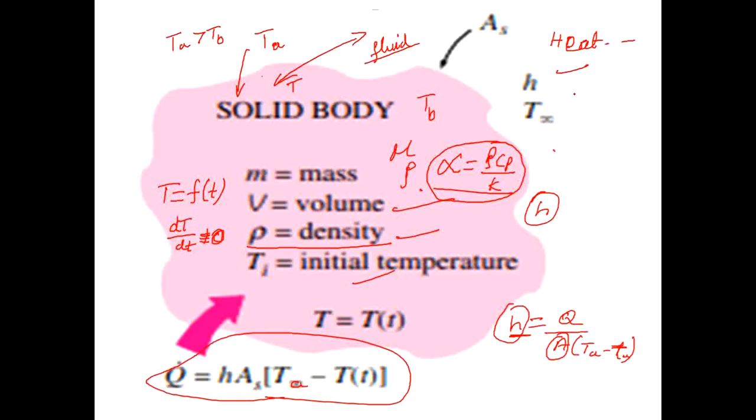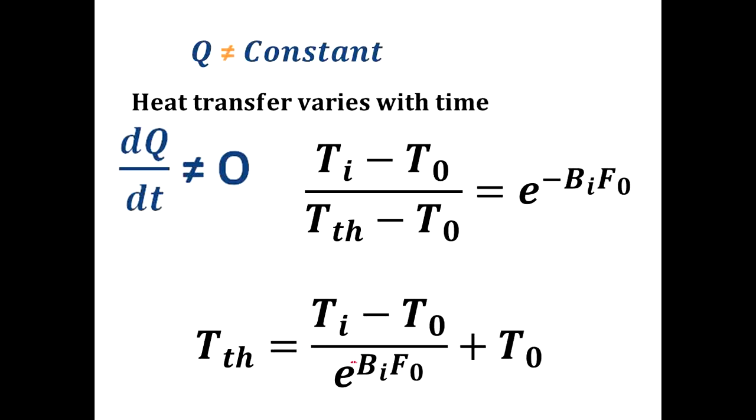An example or application of transient conduction is the heat treatment process. A very good example is the heat treatment process. Another example of transient conduction: sometimes you can consider refrigeration also as transient conduction. Therefore, this is the equation. You have already derived this equation. This is supposed to be minus Bi F naught. What are these things? Let me explain.

From the hot body to outside, the heat is transferring. Fluid, LC, volume by area. What is LC? Characteristic length you want to take: volume divided by area. This is the fluid. The fluid will have the properties mu, rho, K; all these are very important properties. Specific heat is also very important. And also the hot body, the solid body. This is supposed to be the solid body.

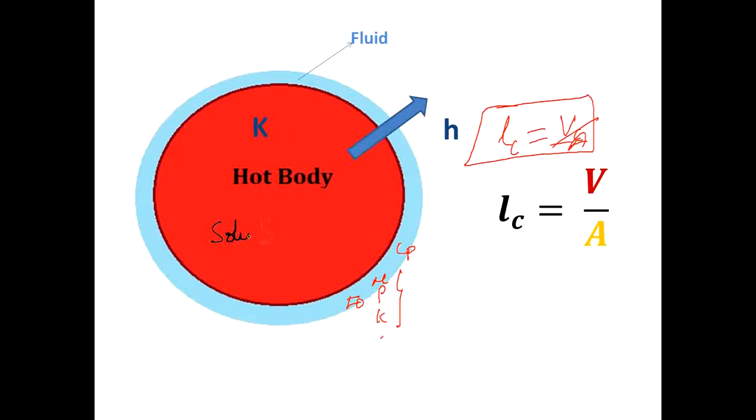This is the experimental setup in our college. How does it work? Let me tell you. We will heat the oil bath. After heating, the oil bath reaches a certain temperature, let me say 110 degrees Celsius. After that, I will keep the specimen. When I keep the specimen here, heat is transferred directly from the oil to the specimen. That is the heating process. I will write a tabular column like this.

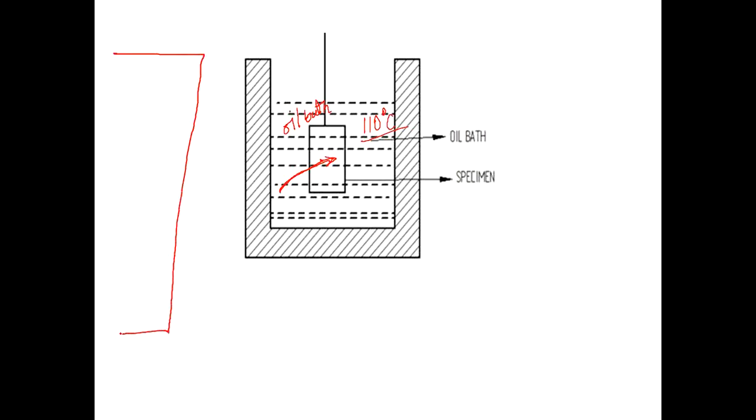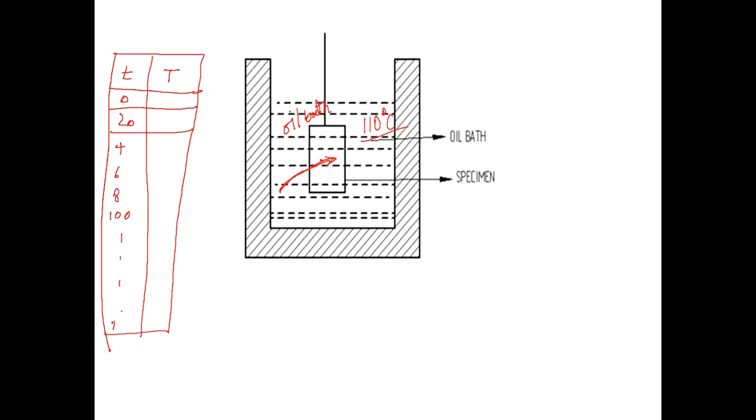Here I will put the time, because temperature will vary with respect to time. At intervals of 0, 20, 40, 60, 80, 100, like this I will go on noting the time up to 400 seconds. At that particular point, whatever the temperature is, from the connected thermocouple, I note the temperature. It will go on like this. Now what will happen? Let me explain this one.

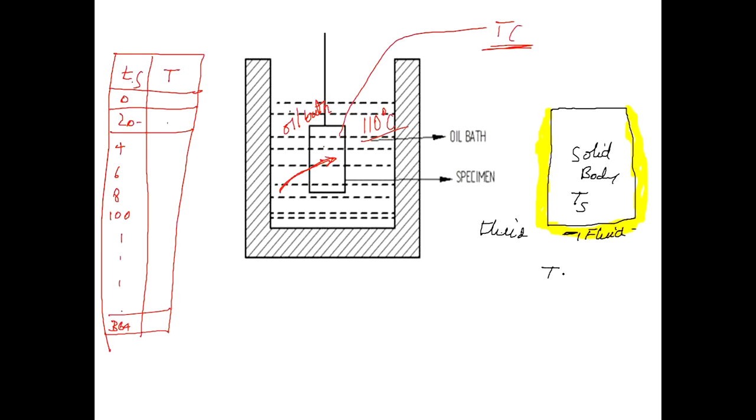This is the solid body, and the fluid. This portion is the fluid film. The fluid film is in between the solid body and the fluid. The solid body temperature Ts, the fluid temperature, let me write T naught. I will take the film temperature as T naught plus Ts divided by 2. At what time do you take it? At 0 seconds you take the temperature and note it down here, and then note down the film temperature.

What is the film temperature of the fluid? The fluid is SAE oil, SAE 40. In the heat transfer data handbook you have this, SAE 40, Society of Automotive Engineers grade 40. Here you take the properties at that particular temperature: rho, nu, K. Note down all these properties. Once you note them down, you prepare the Grashof number.

The Grashof number should be L cube beta g delta T. Delta T means this temperature minus this temperature, because heat is transferring from here to here: T naught, and this is Ts, the surface temperature. Therefore, you note down T naught minus Ts, divided by nu square. Then you get the Grashof number. After getting the Grashof number, you get the Prandtl number. Here also you note another important property, the Prandtl number.

Grashof number and Prandtl number you take. With the Prandtl number and Grashof number, the Nusselt number will be a function of Grashof number and Prandtl number. After this, you will have the Nusselt number, Nu is equal to H LC divided by K. What is this LC?

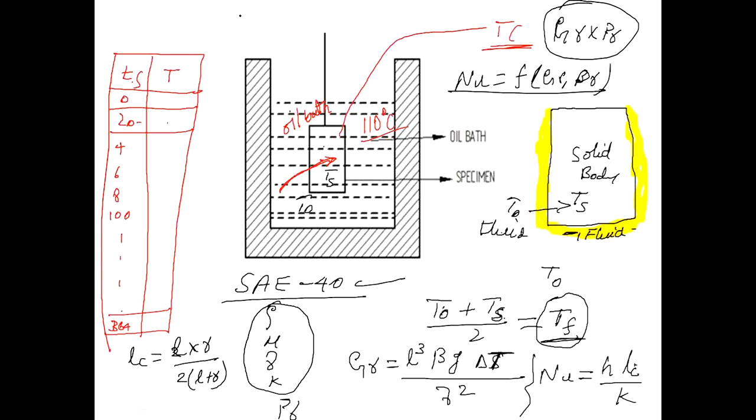LC is your characteristic length. That is L into radius divided by 2 times of L plus radius. Already I told you people that LC is equal to volume divided by area. After solving this one, you will get this equation. Therefore, characteristic length. This is how you want to do the experiment.

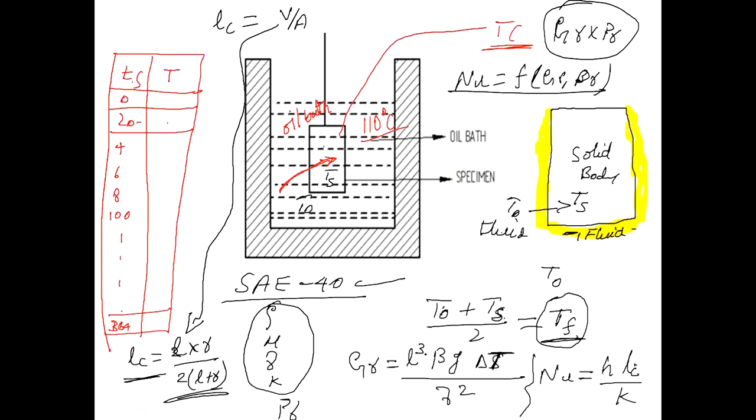Biot number is internal conductive thermal resistance to the surface convective thermal resistance. Biot number, with LC equal to V divided by A, you will solve, and then this will be finally HLC divided by K. This Biot number in your experiment will fall below 0.1. Then it is called the lumped system. That means the internal thermal resistance is negligible compared to the external convective heat transfer resistance.

Already I told you people that in a solid body, internally you have the conductive thermal resistance, and externally the convective resistance. So heat is transferring from inside to the outside, or outside to the inside. But you have a small thin film layer. Here you will have the convection H. So here you will have the conductive resistance, that is L by KA, and this is 1 upon HA. Therefore, L by KA is less than 1 divided by HA. That is the meaning of the lumped system.

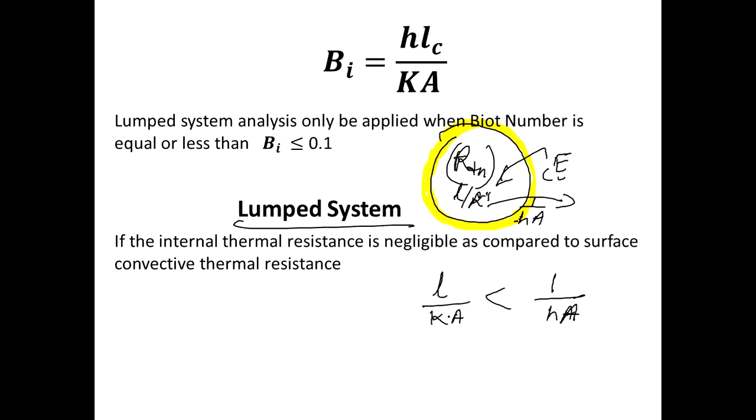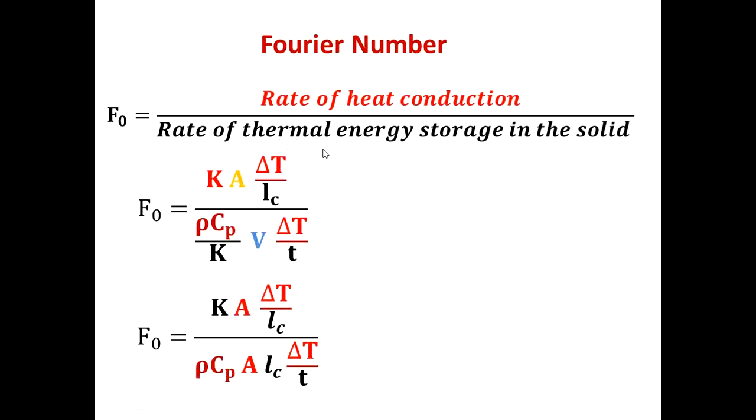In the theory exam also, they will ask you the internal thermal resistance and the external thermal resistance. Fourier number is known as the ratio of rate of heat conduction divided by rate of thermal energy storage in the solid system. Finally, you will get the answer, that is alpha T divided by LC square.

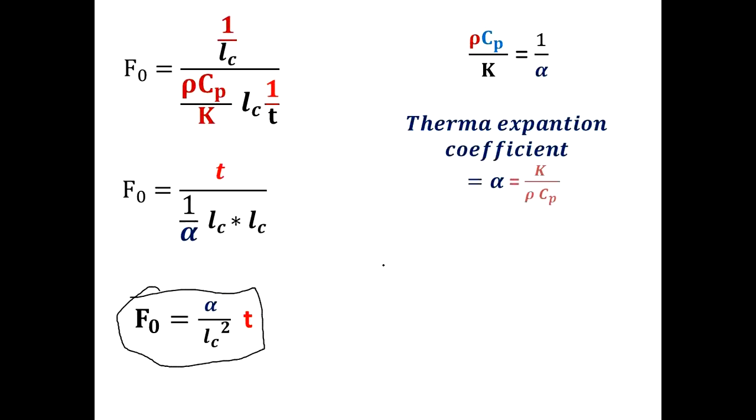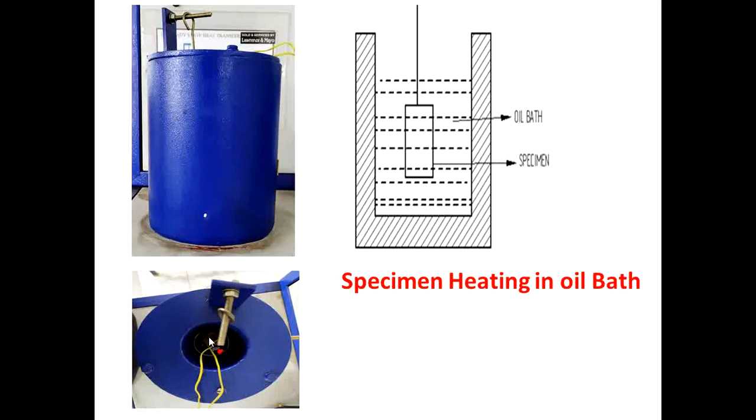Next, this is the experimental setup. This is the oil. You will keep the specimen inside the oil bath, and then heat is transferring from the oil to the specimen, and you will note down the temperatures here. And this is for cooling. For natural convection, don't take the forced convection, just neglect this fan. Keep the heated specimen in the open air, measure the air temperature and this temperature as per the table. In the top view you can see the oil bath, and the specimen will be like this.

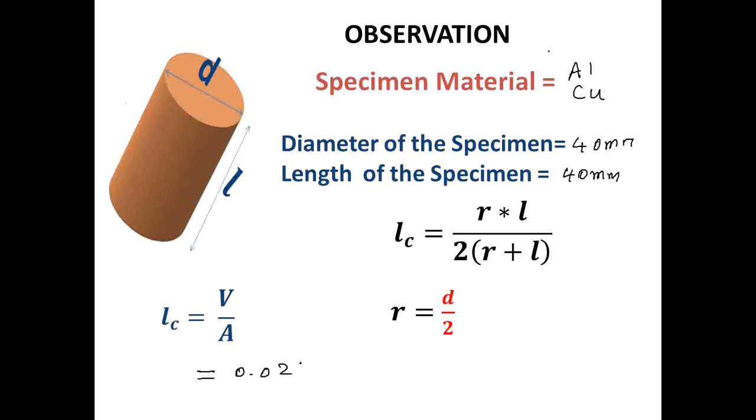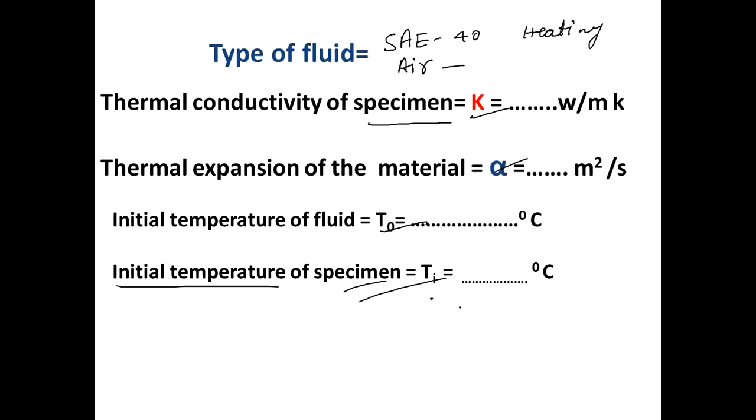Observation. Specimen material. At Vidyavardhaka Engineering College, we have the specimen of 40 mm. Specimen material is either aluminum or copper. The diameter is 40 mm. Length of the specimen is 40 mm. Therefore, the characteristic length will come around 0.0266 meter. You want to note down the specimen thermal conductivity, alpha, initial temperature, everything. See, this is the tabular column.

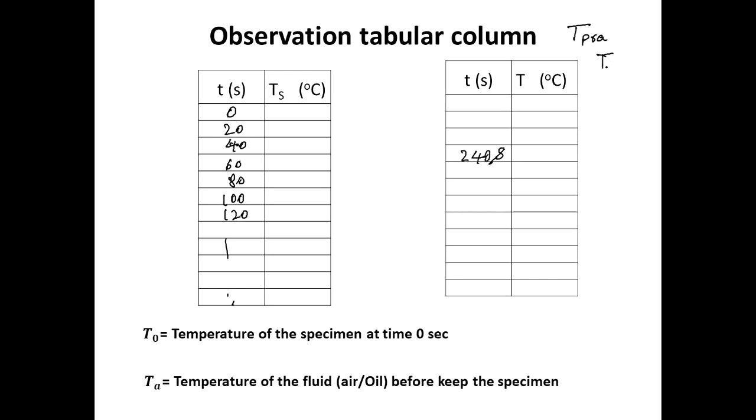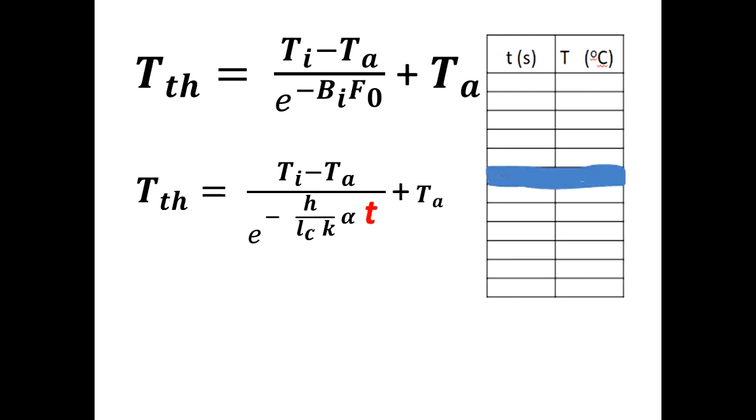It is given 0, 20, 40, 60, 80, 100, 120, and so on. At a particular point, like at 240 seconds, what is the temperature you will note down? Temperature experimental. After this, theoretical calculation you can do: Nusselt number, heat transfer coefficient. The theoretical value will be like this: Ti minus Ta divided by e to the power of minus HLC divided by K into alpha T. For cooling you want to do this one. You note down all these values.

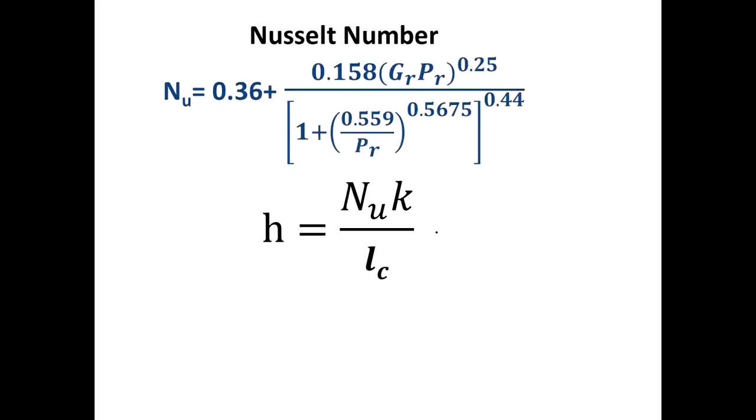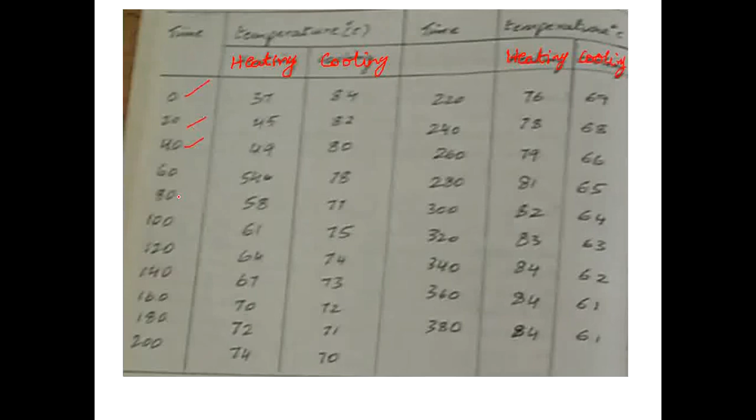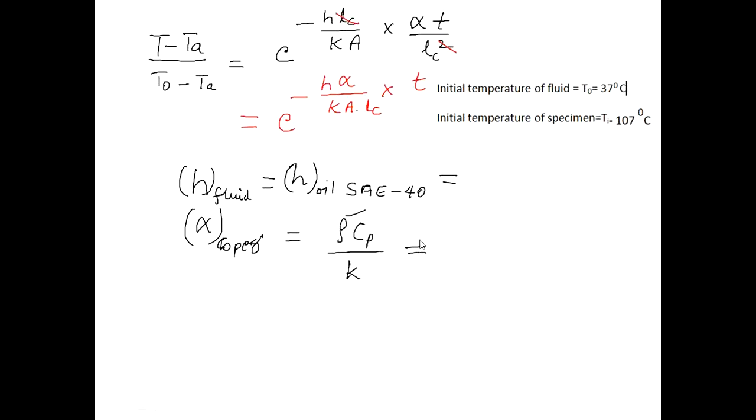Find the value of Grashof number. Go to this equation. Get the value of heat transfer coefficient H in terms of watt per meter square Kelvin. This is the standard tabular column. One side it is for heating, this is for cooling. 0, 40, like this, go and do this one. Note down the value. At 240 you will get a 78 degree Celsius temperature. Same thing you can calculate by using this equation.

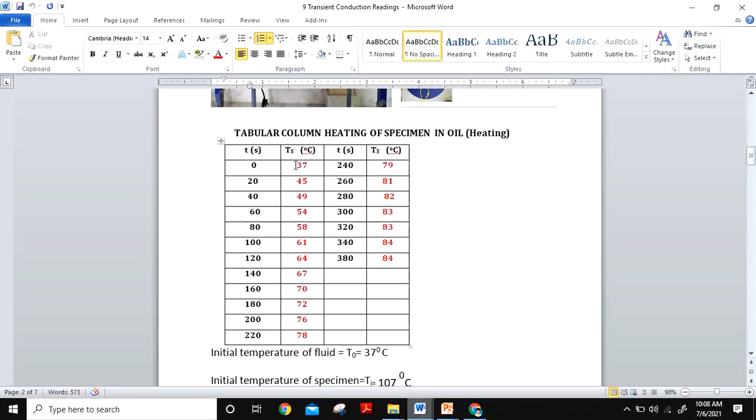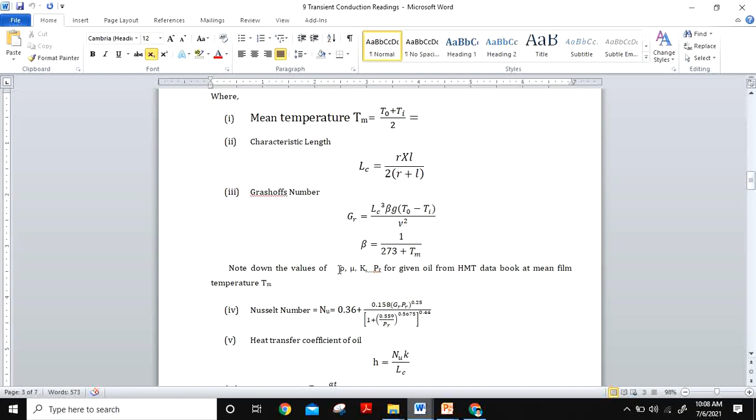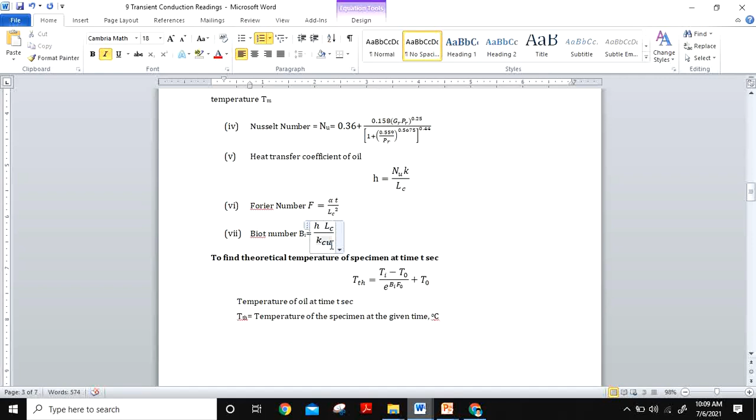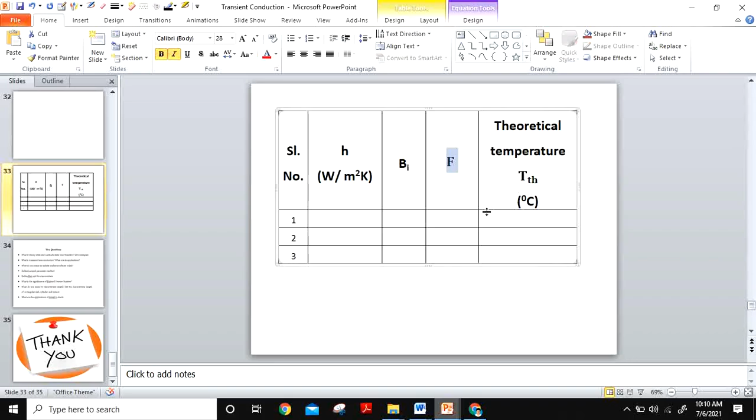You put the values and then you will get HLC divided by K. This is the thermal conductivity of the specimen. For heating I wrote copper, so you write the thermal conductivity of copper. This is your experimental setup. H value you got, Biot number, Fourier number you got. At a time t, what is the theoretical temperature you want to note down. That's all. Result tabular column, viva questions.